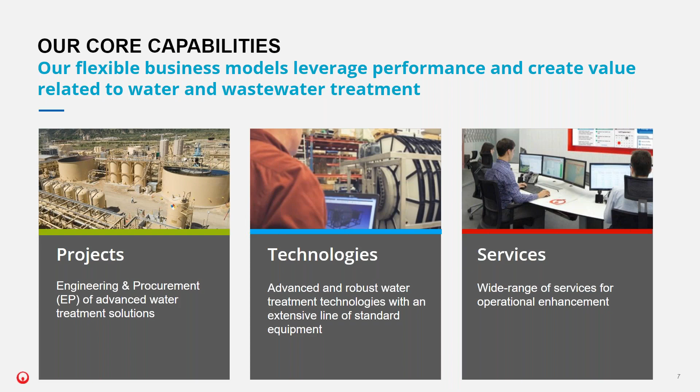A little bit about Veolia Water Technologies: we're a leading water and wastewater treatment company, globally located, and we support our customers through providing project support, technologies, and a wide range of services that support both the projects and technologies that we install. All of our activities include, of course, municipal, which we're talking about today, but we also work in a variety of industrial markets.

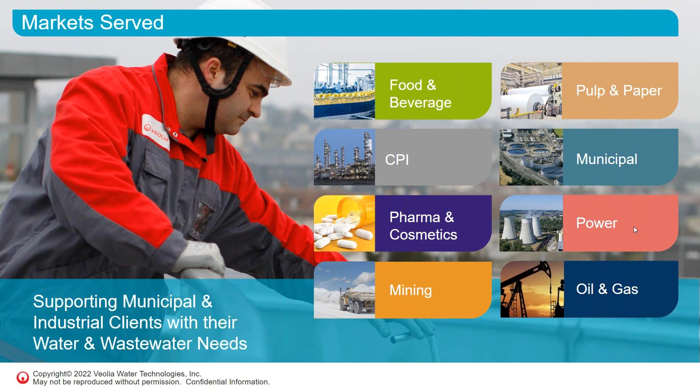Now we'll transition to the technical portion of our presentation. We're lucky to have two panelists here with us today.

The person you'll be hearing from first is Miriam De Laurenti Noel. A little bit about Miriam: she graduated in geological engineering from Polytechnique in Montreal in 2010, and she's been working for Veolia since that time. She works in piloting, R&D, development, laboratory studies, and process engineering. Currently, as a process engineer, she has the opportunity to use her competencies and field experience in water treatment by designing water treatment chains for heavy industry, aiming to reach stricter environmental compliance.

Also with us here today is Daniel Lamar. He's been working as a process engineer for the last 20 years for Veolia Water Technologies based in Montreal. This brought him to work on both drinking water and mainly wastewater treatment for both municipal and industrial projects. His position brings him to work on R&D activities, the introduction of new technologies in the market, and process engineering on full-scale projects. He'll be joining us a little bit later, maybe for the question and answer portion.

At this time, I'd like to hand the webinar over to Miriam, who will share a little bit more about this technology. Thank you, TJ. Good afternoon everyone, thanks for joining us today for this presentation about the Biostyr application.

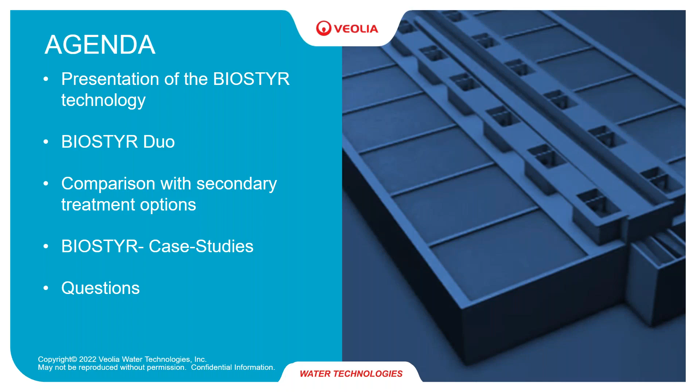So first, what's the Biostyr? A Biostyr is a biological aerated filter.

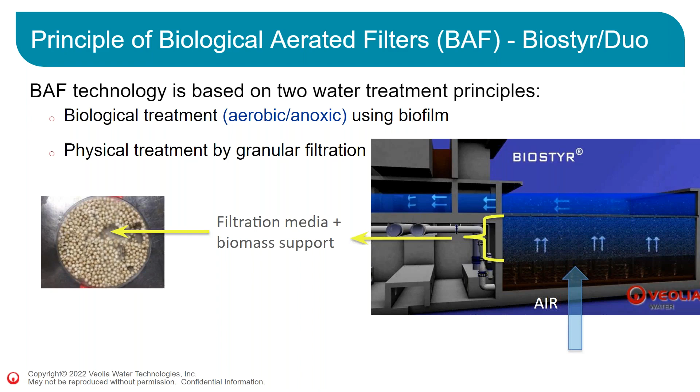It's based on two water principles. It's a biological treatment, which can be either aerobic or anoxic, using a fixed biofilm. It's also a physical treatment by granular filtration. The media used in the Biostyr does both filtration and serves as a support for the biomass to grow.

This is a general arrangement of a Biostyr and a Biostyr DUO cell. The wastewater is either fed through an influent channel or pumped for smaller applications. It goes to the bottom of the cells, and from there the water goes up through the filter, where the media is floating. There's a nozzle deck, which is the media retention system, and then the water goes to the top of the cells, where it flows back to an effluent channel.

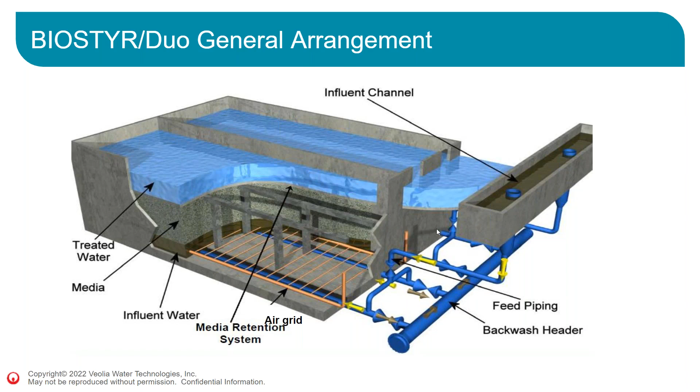So now, how does it work? When the Biostyr is in operation, this is a gravity flow. The water goes down at the bottom of the cells, then goes up through the cell. There are also air grids, as I mentioned earlier, that supply air for the biological treatment up in the media. If the Biostyr is anoxic, there will be no aeration. If there are simultaneously anoxic and aerobic zones, the air grids will not be at the bottom, but higher up in the filter.

So when it's filtrating, the water goes up, the air goes up, and it exits the cells to the effluent channel. The main advantages of this flow are that the filtered water is exposed to the atmosphere, so there's no odor related to the water treatment because you're in contact with clean water instead of raw water. There's also little pumping required, since the only pumping needed is to get the flow down the cell. Once the water is down, it's all gravity flow.

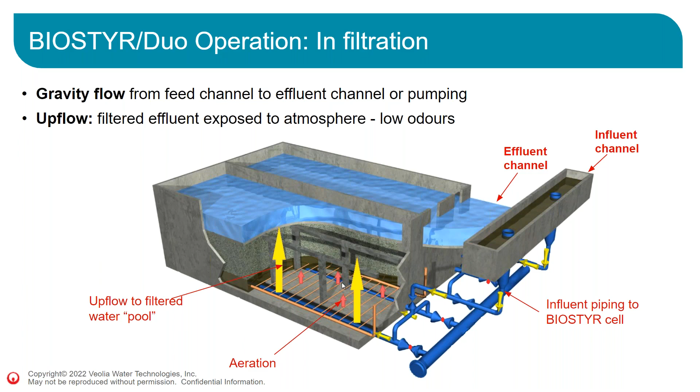Now, when the cell is in backwash, there's a common pool where the effluent goes. The water for the backwash comes from this common effluent channel. During backwash, the effluent valve closes, and the water from the pool goes down. Air is still used during the backwash to make sure the media is well scoured, so we remove everything we need to remove from the filter. Dirty water goes down, then through a main header where all the backwash water collects in a big backwash storage tank, to be released upstream or treated elsewhere - but that's something separate.

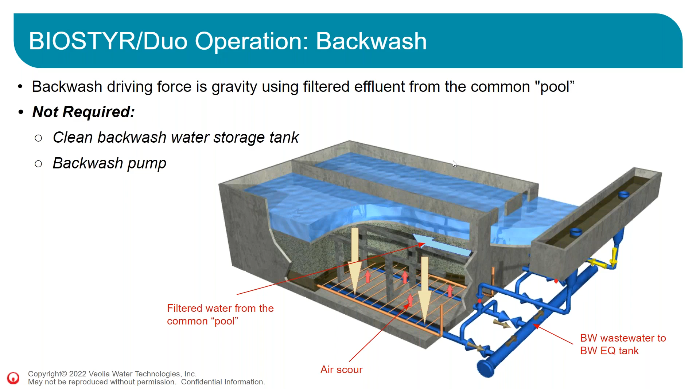The advantages of this type of backwashing are that there's no clean water storage tank required, and no backwash pump required. The only pump needed is for managing the dirty water, but since dirty water accumulates in a tank, the flow rate required is smaller because you just release the water slowly through the system instead of all at once.

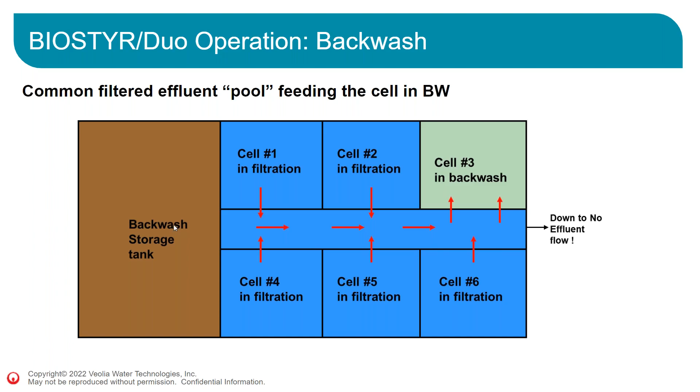This illustrates how the effluent from all the cells goes to the cell in backwash, and then the dirty water is collected and goes to a backwash storage tank.

Now we look at the components of the Biostyr cells. First, one of the main items of the Biostyr cell is its media - Biostyrene. These are small beads that float; they're really light, resistant to abrasion, and chemically inert, so there's no need for replacement. They stay in the cells and don't need to be replaced over time because they typically don't move.

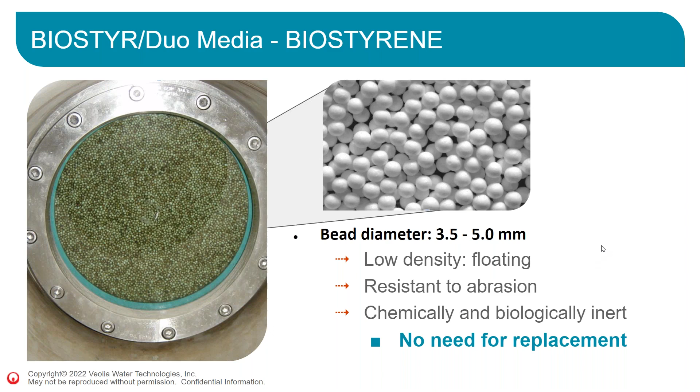This is the inside of a cell - what you'll see if you look inside. There are trench covers where the water enters the cell and where it exits during backwashes. The air grids are stainless steel pieces where the air comes out. Up top, you can see the nozzle deck where the water exits - this is where the clean water goes out.

I'll talk a bit about Biostyr DUO - we'll focus on it more later. One particularity of the Biostyr DUO is the need for trench covers on the floor, to make sure the K5 media doesn't pass through into the influent channel. Here's a representation of the trench cover itself with the little K5 MBBR media chips that can't pass through - they're kept inside the cells so there's no media loss.

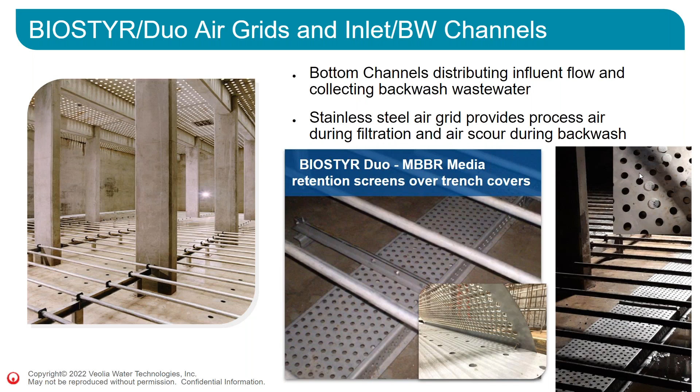So now this is the filter gallery of a Biostyr wastewater treatment plant. What you can see on the left and on the right are the Biostyr cells. In the middle is the backwash main header, where the backwash water is collected to go in the backwash tank. The backwash valves that allow the backwash are below the grates here, and there's piping allowing the wastewater to go at the bottom of the cells. You can also see the air header at the top. The air all goes to this main pipe and goes to each of the cells.

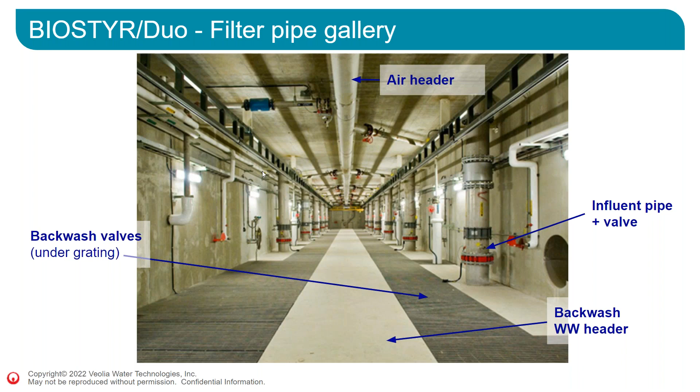Now this is a look at the nozzle deck. We've seen inside the cell, and this is outside of the cells. When you look from the top of the cells, you can see all the little nozzles on the nozzle deck. What you need to know is the nozzle deck is made of prefab nozzle deck slabs, so these come all fabricated and are just installed on site. You can see where the nozzles are installed one by one from the top, so it's easy to install. This is the look of the nozzle deck, the nozzles that keep the biostyrene beads inside the cells.

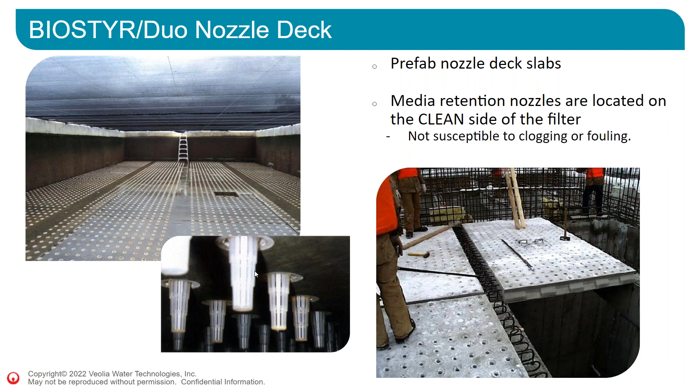So now this is a quick overview again of the cells. What I want to show you here is the gates that allow the clean water to go out of the cells. When there's some maintenance required on the nozzle deck, these gates are lowered, so there's no water coming in, and you can go down here to do maintenance when required. This is not something needed on a regular basis, but sometimes you may want to go down to see how the nozzle deck is doing. So this is how you can do it: you lower these gates and you have access to the nozzle deck for maintenance.

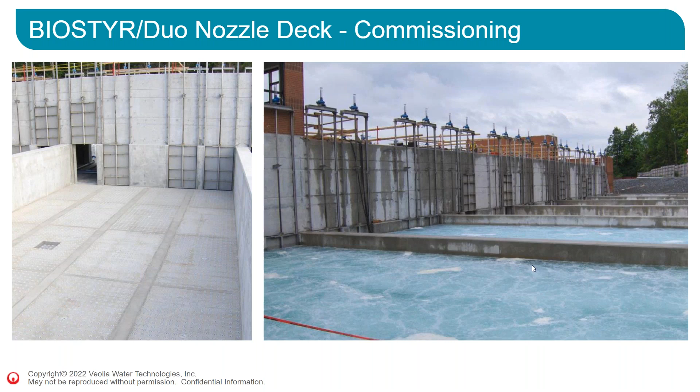And you can see a test in clean water right here. So this is what a Biostyr cell looks like during operation with aeration. What I want to highlight here is that it's fully aerated effluent, with strong aeration. This is because it's a very compact system, so the aeration requirements are the same as a regular biological treatment, but since it's so compact, it gives an impression of very high aeration. You can also see that it's an even air flow distribution, evenly distributed everywhere through the cell.

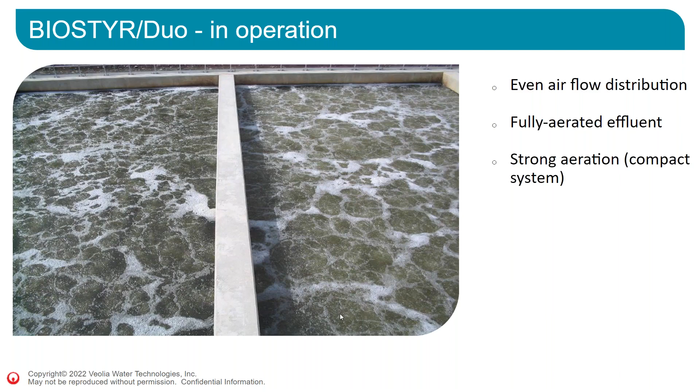Biostyr and Biostyr DUO can be operated in winter, even if it's an outside application. You can see here with the snow.

Now, one of the things with the Biostyr and Biostyr DUO operation is that it's fully automated technology. The number of cells in filtration are controlled by the automation. You can decide to control them however you want, but by default, the number of cells in filtration is according to the hydraulic load and the pollutant load. The cell goes into idle by itself and goes back to filtration according to the requirement of the cells. The main objective is to make sure that the biomass stays in the perfect conditions to thrive, and to make sure it's never starved. This is why there are idle cells, to make sure the biology of the cell is always optimal in all conditions.

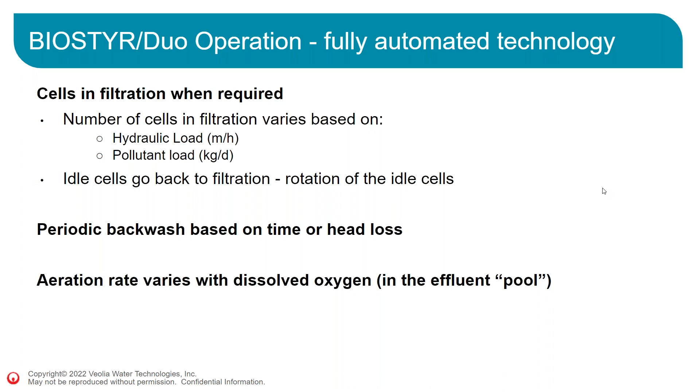Backwashes are based on time or head loss, so that's automatic as well. The aeration rate is also controlled by the automation to make sure you have the right amount of air for the bacteria, especially for the nitrification, according to the requirements. So there's more air when there's more ammonia and less air when there's less ammonia. This makes it efficient and allows good water quality at the end.

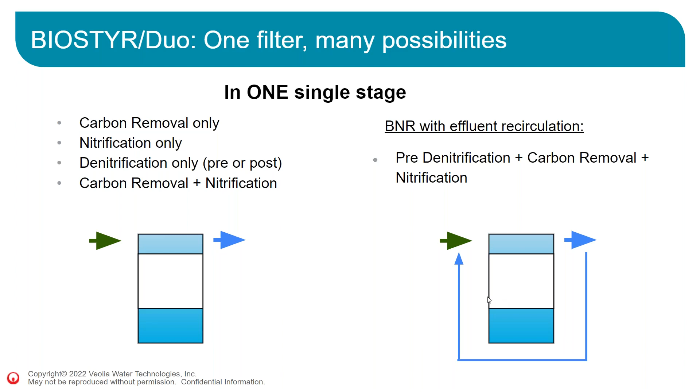One of the good things about the Biostyr is that with one single filter, one single cell, there's a lot of possibility for the design. You can design a Biostyr for carbon removal, for nitrification, denitrification, pre-denitrification or post-denitrification. You can do carbon removal and nitrogen removal within the same cell, because the Biostyr allows biomass to grow for carbon removal on the lower portion of the biofilter, and then nitrification in the upper portion. It's also possible in one single stage to add pre-denitrification by recirculating the effluent charged with NO3. So you have an anoxic zone at the bottom of the cells that allows the denitrification, and then you have aeration to get the nitrification and/or carbon removal.

Now you may wonder what's the possibility for treatment with a Biostyr. How low can it go? One thing to keep in mind is the design of each Biostyr is according to the requirement for the discharge. So if you need 5 milligrams per liter as total ammonia, it won't be designed for below 1, it's going to be designed for 5. But this just gives a general idea of the possibilities, how low you can get with one single Biostyr cell.

One thing I want to highlight is phosphorus removal is not achieved. There's no biological phosphorus removal with the Biostyr. However, it's possible to get a Biostyr with an Actiflo downstream, or any ballasted flocculation for chemical precipitation of the phosphorus. With this combination of Biostyr and ballasted flocculation, it's possible to go below 0.1 milligrams per liter as phosphorus. It's just something you need to keep in mind.

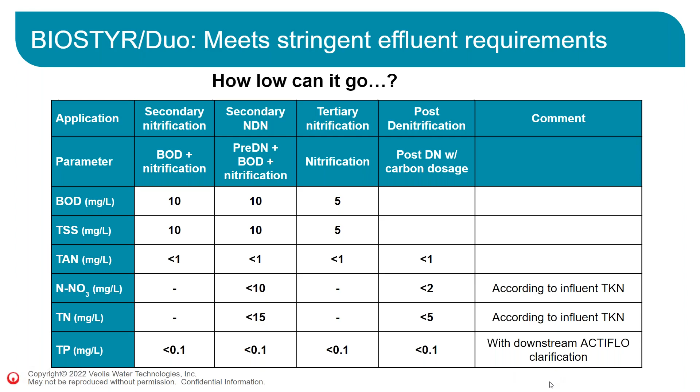So what are the highlights of the Biostyr process? Something I will repeat often during the presentation: this is something that is very compact. Very compact also means it reduces construction cost because you will need less drilling, less concrete, less blasting, so it's easier for the construction of the process.

It's also very easy to operate. It's fully automated. There's little to no operator intervention. You still need someone to look for optimization of the process, but there's a lot of alarms and a lot of things in the operation of a Biostyr that make it quite independent when need be.

And there's no concern with sludge settling or bulking, since it's a fixed film. The backwashes are optimized to make sure that the sludge is managed correctly and the biomass is correctly managed.

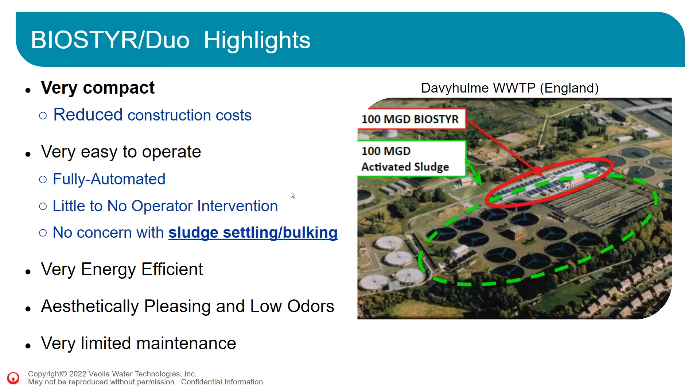So where does a Biostyr really shine when you look at different technologies? It's when you have a footprint-constrained site, when you have very limited space for expansion, when it's very costly to expand. As an example, on the right side, there was a hill on the site, which would have been really costly to just blast through. But using the Biostyr, you didn't have to blast the hill, so it was interesting for construction cost itself.

This is an application that is really interesting when there's an existing primary clarification, because it does require primary clarification upstream. It's a filter. It's a process that is really good for large flow, when the flow is higher than 25 million liters per day, and there's no limitation as a max flow, it's just a question of number of cells.

I'm so sorry, I'm sick.

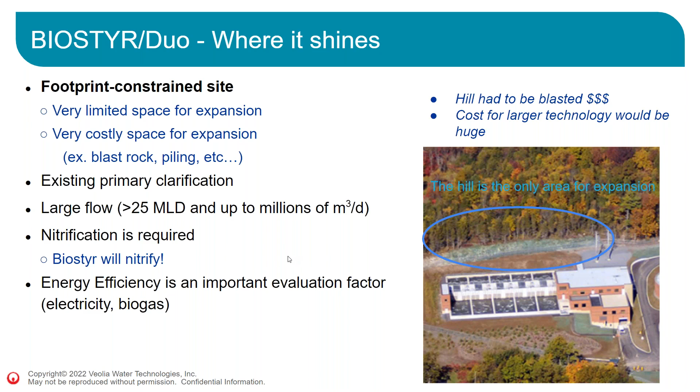It's also a good project when there's some nitrification required, because the Biostyr can do BOD and nitrification removal in one single cell. So there's only need of one step, you don't need two steps to do both. And it's an energy efficient technology. I will talk a little bit more about this later on.

So Biostyr, you might have heard that some people are concerned about losing some media during backwashes into the backwash tanks, and getting the beads out of the backwash tanks is not an easy task.

Most of the time this is due to bacterial stress. What could cause bacterial stress? One of the causes we've seen often is the lack of phosphorus. There's not enough phosphorus in the Biostyr. The result is the bacteria get stressed. They create exopolymers, and these exopolymers will create clumps of Biostyr beads that will be dragged through the backwash.

So there's a couple of mitigation solutions. It can be either to control the process so there's no bacterial stress, which is really hard. Another solution was to install a bead trap that allows the beads to be trapped and then sent back into the Biostyr cells. It worked really well. And the third one is the Biostyr DUO. So process intensification is also a mitigation of bead loss.

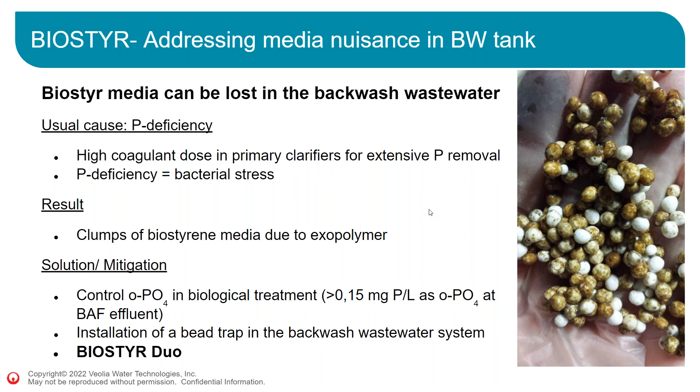So how can a Biostyr DUO eliminate bead loss? I'll go very briefly here because I will present the Biostyr DUO soon. What you need to know is Biostyr DUO uses 2 different media within the Biostyr cells. One is the Biostyr, which is the same one from the classical one, and the second one is the MBBR. What happens is the MBBR acts as a filter to make sure that the Biostyr beads cannot pass through and cannot be lost during backwashes. The clumps just get stopped by the MBBRs that are floating around.

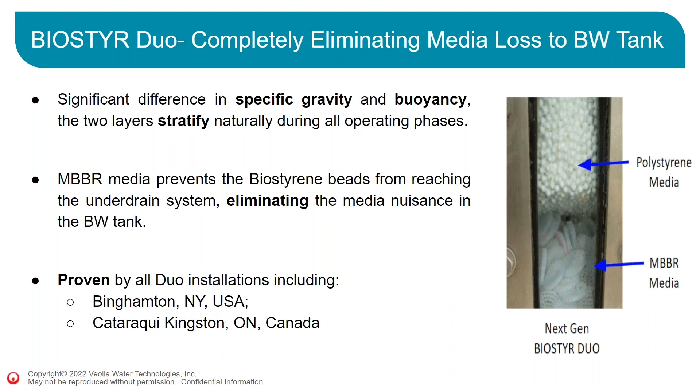This has been proven for all the DUO applications, which includes the Binghamton one, located in the US. It's a Biostyr DUO cell, and it's also been proven in Cataraqui Bay. Both of these plants have been operating for a couple of years now, and none have seen any media loss since their startup.

So now it leads up to: what is a Biostyr DUO? Biostyr DUO is a Biostyr in which you're adding MBBR. So it's like having a small MBBR tank upstream of your Biostyr, but the MBBR is in fact inside the Biostyr cell. It could do some BOD removal upstream of nitrogen removal, or it can be the anoxic part during pre-denitrification upstream of carbon and nitrification removal.

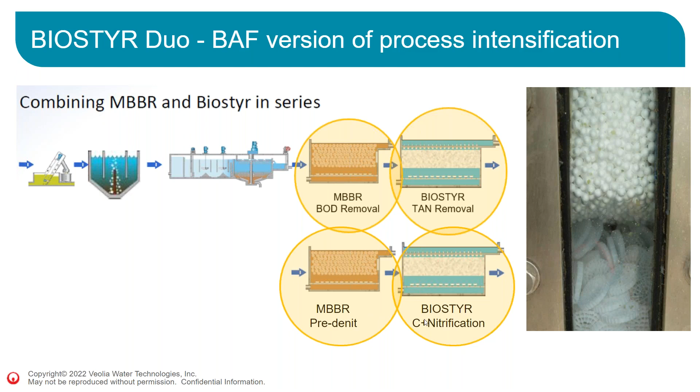So this is, as I mentioned before, the BAF version of process intensification. The objective is we have a known volume. How can we do more within the same volume?

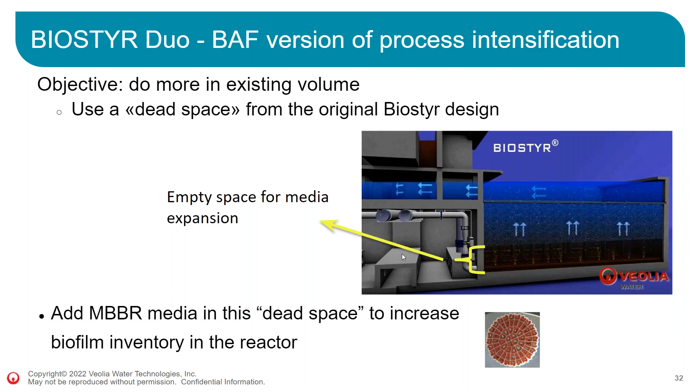In a Biostyr, there's an empty space for bead expansion. This empty space for the Biostyr DUO is used as an MBBR tank. So we're adding MBBR carriers in the empty space to provide the MBBR portion of the Biostyr DUO. It adds more biomass, so it can allow more treatment, more pollutant load treated within the same cells, because you're using the MBBR, which was not there before.

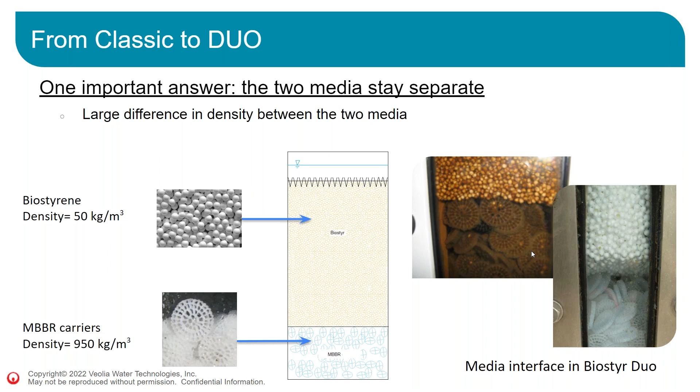So there are some beads that might get stuck at some point when we go really aggressive on the backwashes. But the good thing is these beads are not progressing - there's not more and more beads. It's pretty stable over time, and it's not having any impact on the process efficiency.

Why go with the Biostyr DUO? Well, we observe longer filtration times. This is mostly because the MBBR carriers are below the cells. In the Biostyr cell, most of the heterotrophs removing the COD and NO3 grow on the lower parts of the Biostyr. But with the Biostyr DUO, they actually grow on the MBBR carriers.

So these heterotrophs don't grow on the biostyrene media. It's easier to scour with the MBBR carriers, and it decreases the head losses in the actual filters, because these very bulky bacteria are in the MBBR where there's no effect of clogging. The Biostyr really sees the autotroph bacteria which are less clogging.

It also allows a more compact system because the MBBR takes care of part of the load, so you can have a smaller treatment footprint for the Biostyr. And as mentioned before, it prevents the Biostyr media from being lost during the backwashes.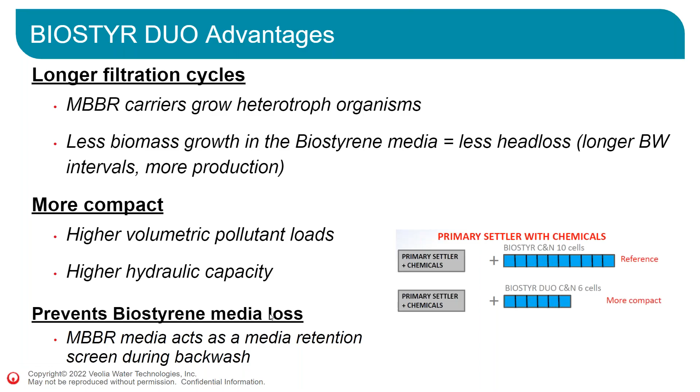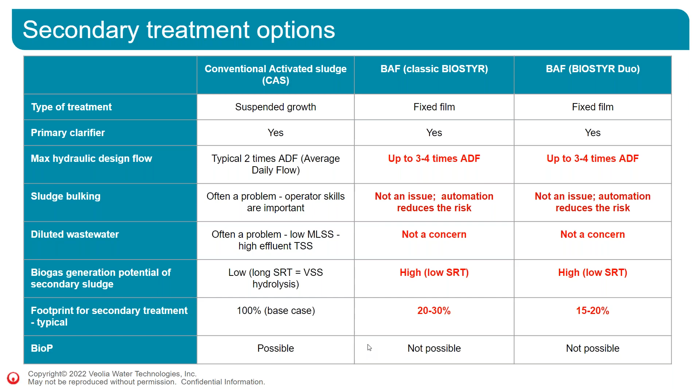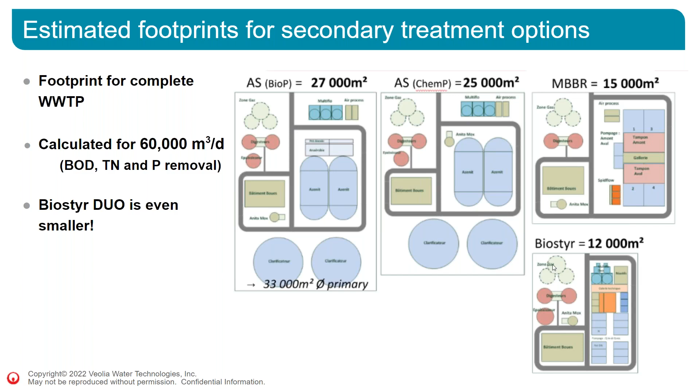So estimated footprint, Biostyr is way smaller than other technologies. Let's forget about the first one because it's BioP. So let's compare activated sludge with chemical treatment to the Biostyr - there's more than 50% reduction of the space.

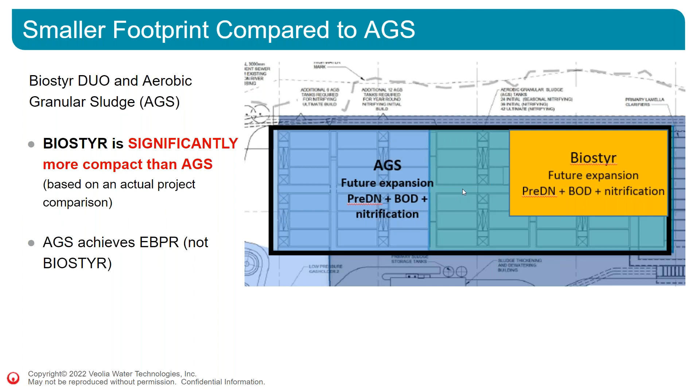This is a footprint comparison with the aerobic granular sludge. The Biostyr is way smaller than the aerobic granular sludge. Once again, you might need to add a little footprint for the ballasted flocculation for phosphorus removal, which is removed with the AGS, but it will still be smaller than using Biostyr plus ActiFlo compared to using AGS.

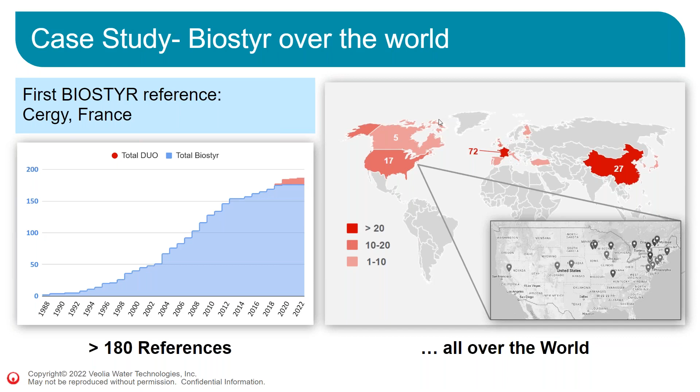So now we selected a couple of them that were specific for various things we already highlighted through the presentation. We will present them here just to have a more visual impact of what was discussed during the first part of the presentation.

So the first one is the Portsmouth Biostyr, which is in the USA. One of the specifics of this project is the very limited footprint. This is a plant that was only primary enhanced chemical treatment that was working well for what it was doing, but at some point they needed to do complete nitrogen removal. So they needed to increase the capacity, and they needed to change the process to allow nitrogen removal.

But they were very, very limited in the footprint. It's on an island - there's a lot of parks, historical districts, and everything around. So they were very tight to do some biological secondary treatments. They did several pilot studies, testing MBBR, Biomag, and Biostyr, and after analyzing the three technologies, they decided to go with the Biostyr.

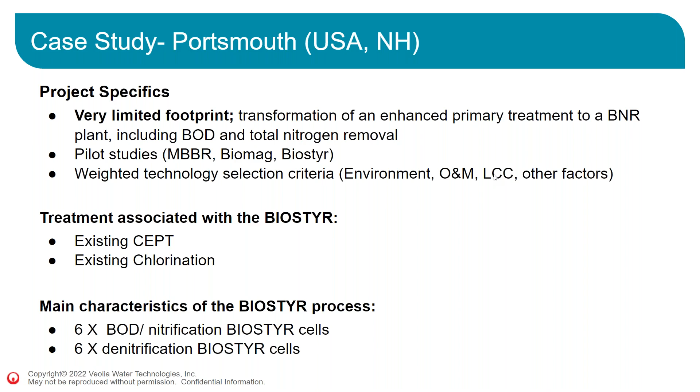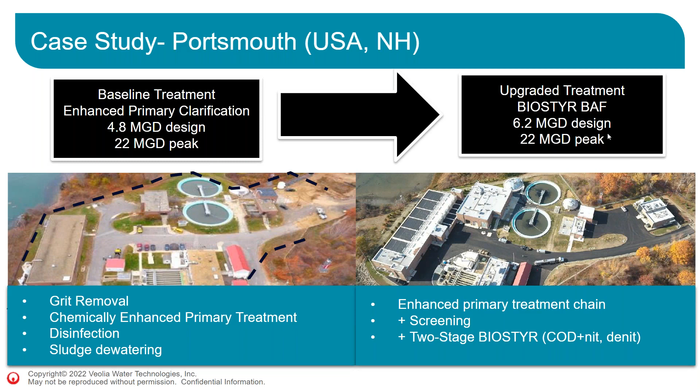So this is where it's getting interesting. The plant before was the enhanced primary here - what you can see on the right side is the new plant with total nitrogen removal. There's Biostyr cells right here on the left side of the right picture showing the nitrification removal Biostyrs, followed by the denitrification removal Biostyrs. And as we can also see, the average flow from the primary clarification plant to the Biostyr BAF plant shows an increase in the design flow.

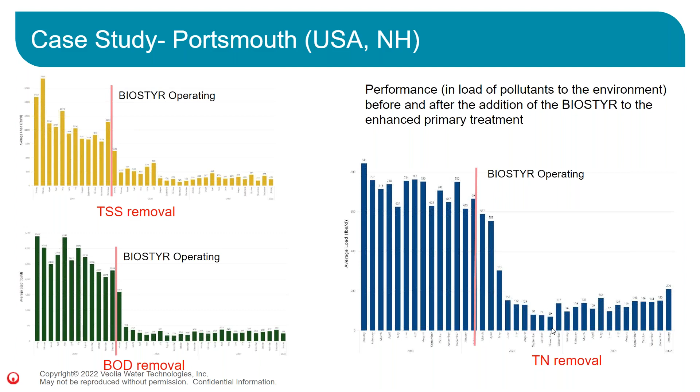The second case study is Onondaga in Syracuse, USA. One of the specifics of this project is they already have activated sludge for secondary treatment, but they needed additional nitrification as a tertiary treatment, and they needed phosphorus removal as well. So this case study is selected because you have a Biostyr for nitrification followed by ActiFlo for phosphorus removal.

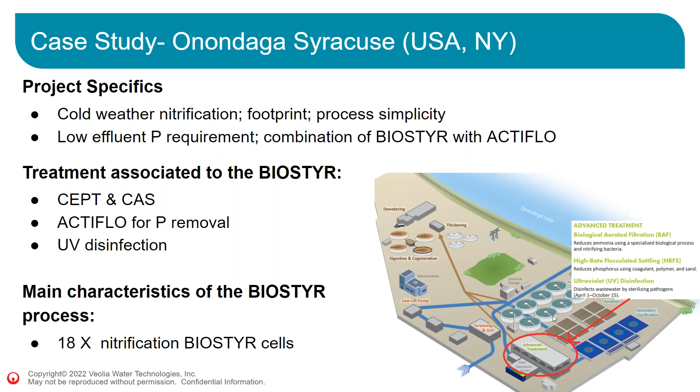This is what we can observe for the nitrification performances. So performance of the secondary treatment is on the left side of the graphs, and then on the right side, this is when the Biostyr was in operation. And what can be seen on the side of metropolitan Syracuse is that the BAF process lowers ammonia down below 1 milligram per liter at all times.

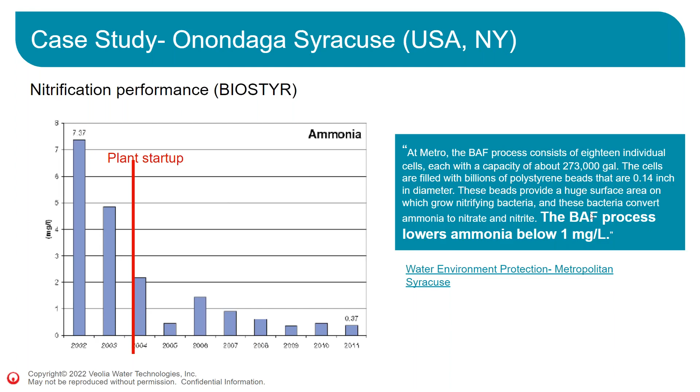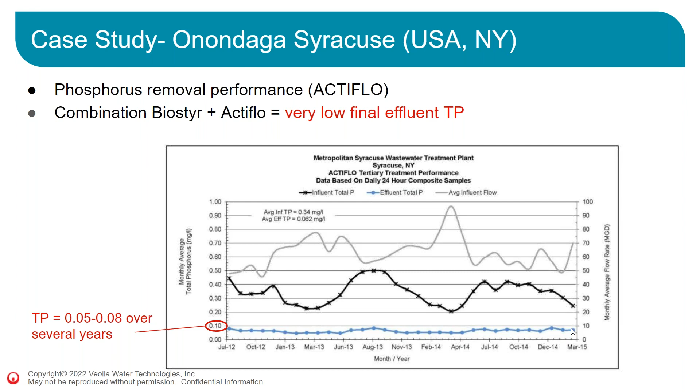And then for the ActiFlo performances, they needed a very stringent phosphorus removal. So what was observed since the beginning of this plant is total phosphorus from 0.05 to 0.08 over several years - below the 0.1 they needed to meet. So Biostyr and ActiFlo is a very good combination to achieve a low final effluent phosphorus concentration.

The third case study selected is Cagnes-sur-Mer, which is in France. This one is selected because the SPIDFLOW is a DAF - dissolved air flotation - used as a primary clarification step. And then the Biostyr is downstream of the SPIDFLOW.

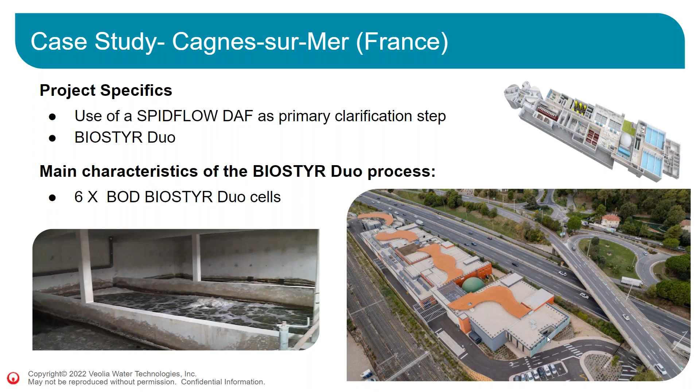As you can see, once again footprint was very, very limited for this plant. This is a picture they sent me, an aerial view of the plant - it's stuck between highways.

Another thing, this is a Biostyr DUO, one of the Biostyr DUO for carbon removal. So looking at water quality through the treatment chain, since it's for carbon removal, it's COD and TSS removal. You can see good performance for both the SPIDFLOW in red and the Biostyr in yellow, meeting the criteria for TSS and COD.

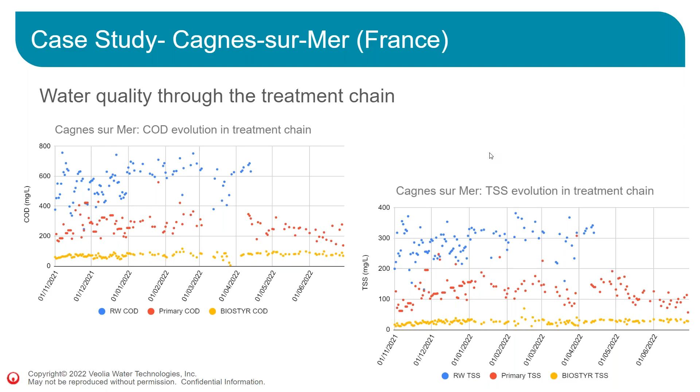And since it's a SPIDFLOW, we also wanted to see the performance of the sludge. We could see they manage about 60 grams per liter sludge for the operation of their SPIDFLOW, which is very good because it diminishes the handling of the sludge. It's easier to manage on sites, so that was a very good combination with limited chemical requirements, though there are still some chemicals involved.

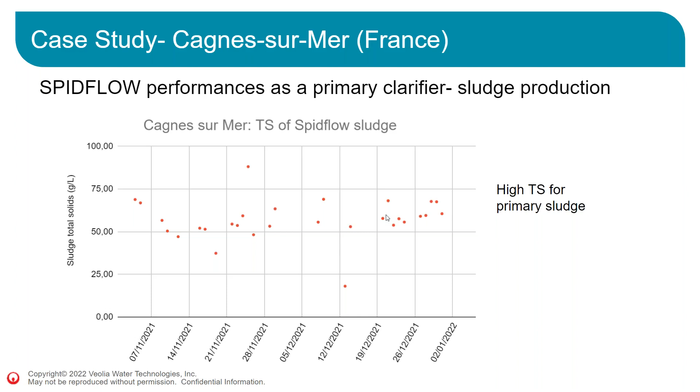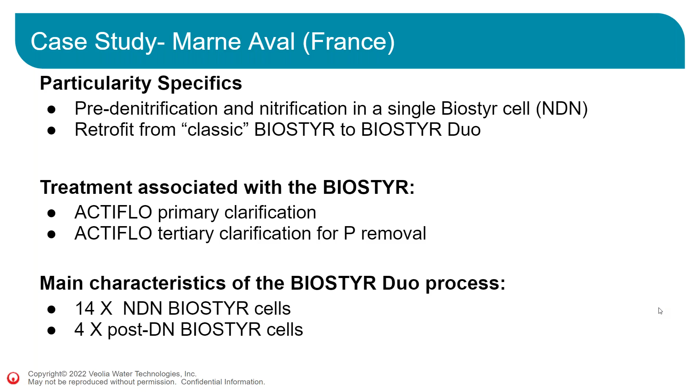The fourth case study, we don't have results yet because the site is still in commissioning. It's Marne Aval. One of the particularities of this project is it was a classical Biostyr for denitrification and nitrification, what is called NDN. They had classical Biostyr cells and decided to switch them all to Biostyr DUO. Right now they are converting the last Biostyr cells down to DUO cells, so since I don't have results, I'll present how they did the commissioning and the switch from classic to DUO.

The takeaways so far during commissioning: they have 40% less dirty backwash water, because they have less clogging and so require fewer backwash cycles, reducing the amount of water produced and needing treatment. They also increased the efficiency of nutrient removal, because reducing the clogging in the cells reduces the bypass they needed to do when there was too much load. Since they switched to Biostyr DUO, these bypass events became much less frequent because clogging was well managed.

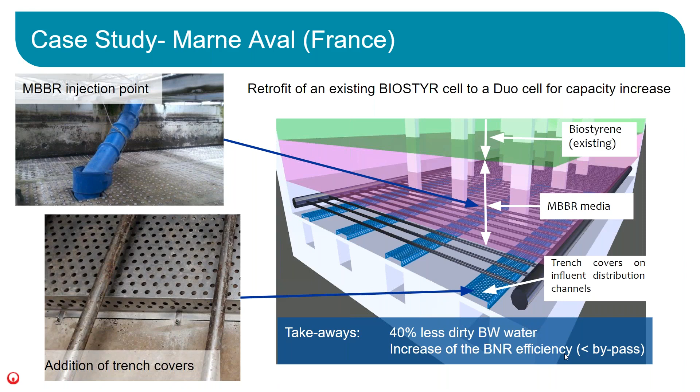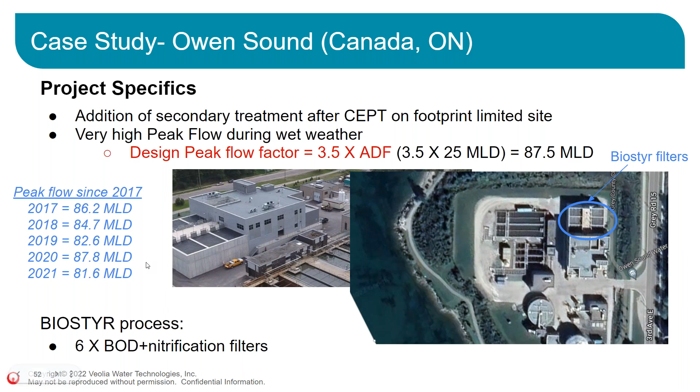Now, as with a lot of technologies, with Biostyr you like to put your hand in it and test everything. So there's piloting — we mentioned piloting for one of the plants that tested several technologies. Veolia has pilots to test the Biostyr, both Kruger in the US and Canada. We both have pilots with 36 inch columns that you need to feed with primary effluent from 2 to 8 cubic meters per hour. A pilot test is about 6 months.

It can handle various configurations. It's designed so you can move the air grid inside. You can test DUO or classical configurations, with or without denitrification, with nitrification, whichever is required on site.

The main objective when doing piloting of the Biostyr and the Biostyr DUO is to demonstrate the performance of the process. The results help optimize the full-scale design, because the design is normally done on hypotheses that are usually applicable, but when you actually test it beforehand, you can be more aggressive in the design because you know exactly where you're going.

One of the big highlights of piloting that we need to stress is that the operators get to know the technology. The operators can play with the pilot, work with it, work with the people, and have people come for training to follow the pilot, so they can really get familiar with it before going large scale. This is really helpful for commissioning — you already have the knowledge in hand when you start the full scale application.

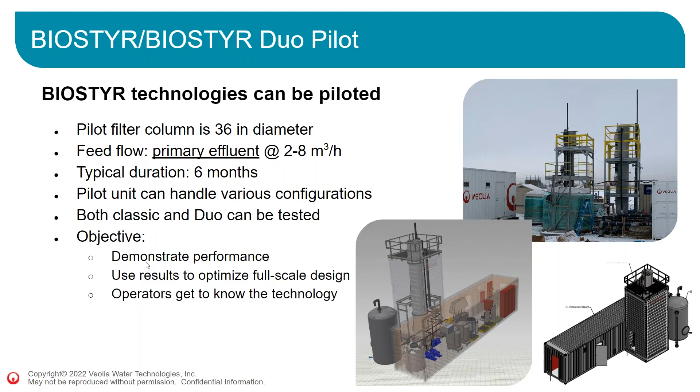So now, what are the key takeaways about Biostyr? When should you consider the Biostyr or Biostyr DUO process? Well, when you need process and operation simplicity - there's not a lot of mechanical equipment, there's a lot of automation, so it's really a process that is easy and simple to operate.

There's good health and working conditions because it's an upflow process, so you're always on the clean water side. This is better for when you have an outside treatment facility - it smells nice and looks good because it's clean water.

It's a very good application when you're landlocked, when you don't have any expansion possibilities - because you have houses around, when you're on an island, or when the land is hard to work with, when there are hills or a lot of rocks.

This is a good application because the footprint is so limited that you have less problem handling space limitations. And since the footprint is very limited, the treatment capacity is very high, and it works really well in diluted water.

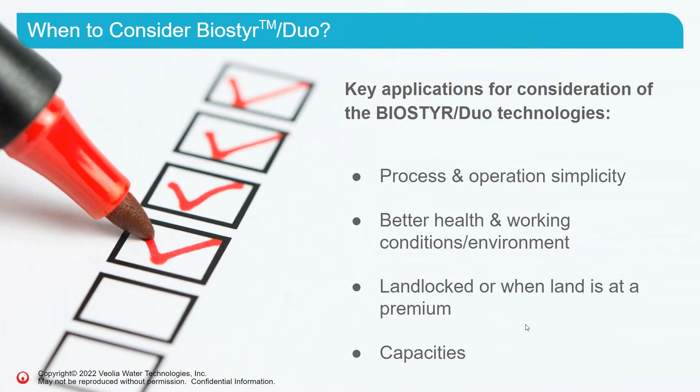So that concludes the presentation. I hope you enjoyed it. And now, TJ, I'll hand it over to you for the questions.